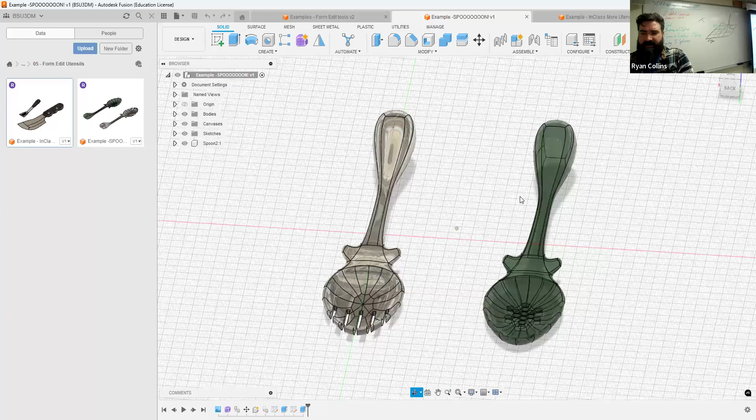So let me switch over. First thing is we made just some basic spoons. Two can be similar, so it can be an original object, and then the other can be a modified version of that, and the third has to be its entirely separate thing. I do expect handles, details, all that sort.

So a real simple way of working is something like the spoon shape. Let's start a new project. Save what you got. Example, we'll say new spoon. All right. So how we're going to go about this is obviously start with create form. You can most certainly work from a pre-made shape, that does help. Let's see if I remember to insert or have a picture on hand.

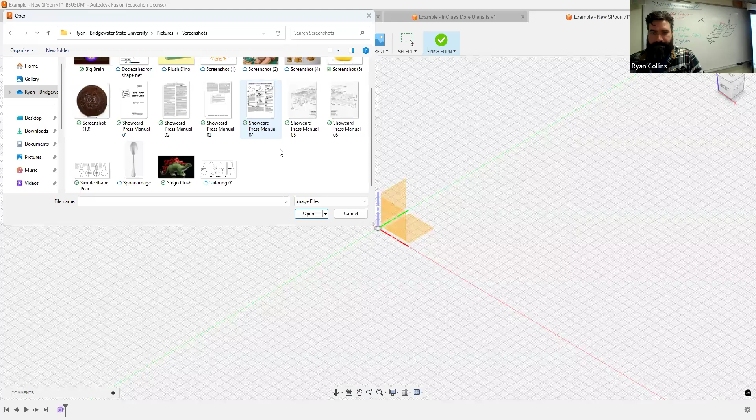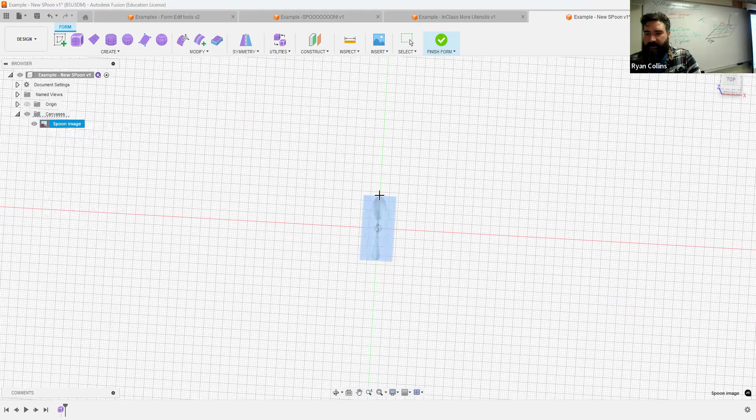The old spoon image, why not? All right, that'll probably work. Hit OK. And how big should a spoon normally be? I don't know, let's say it's about 6 inches, which is roughly 150 millimeters. Okay, so go to canvases, right click to calibrate, top, pick 2 points, or you can make this a gigantic spoon.

So right now it's 34. Let's say, I don't know, 165 for no good reason. Resize, and there we are.

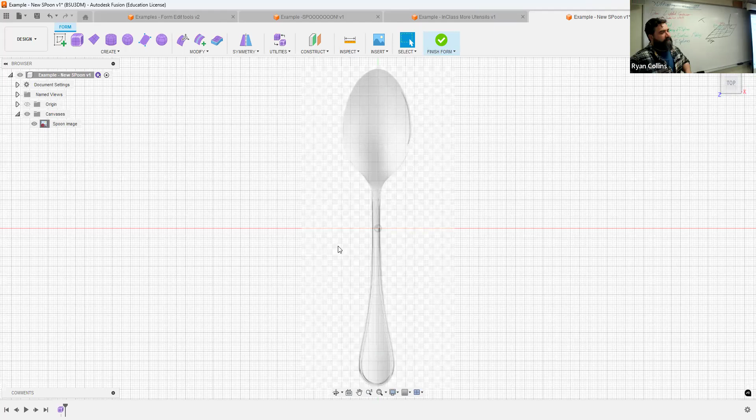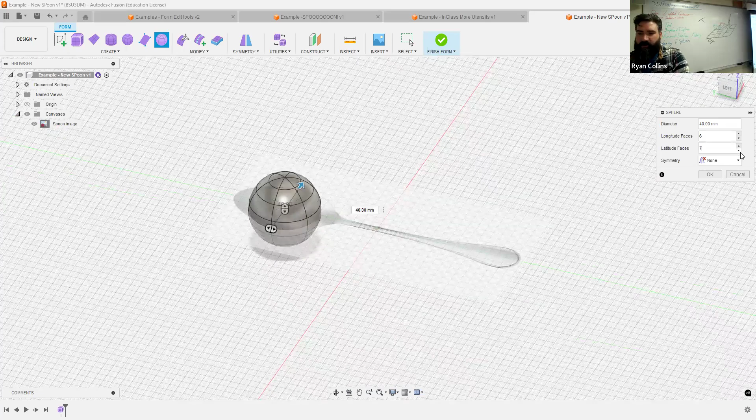Okay, so I'm currently still in the Form Workspace. No need, I don't need to be out of the Form Workspace to work. But what we're going to do is basically break this into two separate objects and then merge them and such. So starting point, easy starting point would be, let's start with a sphere. Build from there, close enough is close enough. You're going to drag this roughly to the size. That'll work. Now, like I said, one of the main things, keep this simple for now. If I need to bring the amount of faces down a bit, that will work best. So there we are, super duper.

What's up? How do you make sure that the circle is perfectly in the middle? So it's easy, doesn't have to be... but I just dropped it in place. Yeah, it doesn't have to be exactly in the center, but it does help.

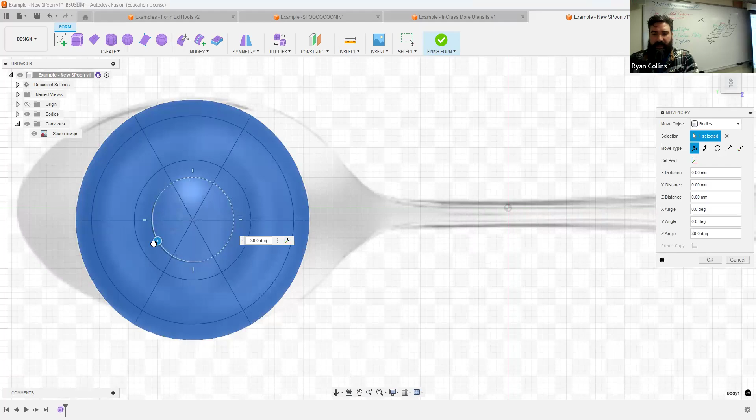Now, the one thing with reducing the amount of faces here, symmetry kind of gets more difficult to mess with. So what I mean by that is I'm looking at it from the top, and I really want this to be symmetrical left and right. So I would need to rotate this sphere. Let's grab that, rotate it so that line lines up with the major axis. That'll work much better. So now I can apply symmetry. Let's do internal symmetry, cross, and now you can see that green line is applied across the sides. Great.

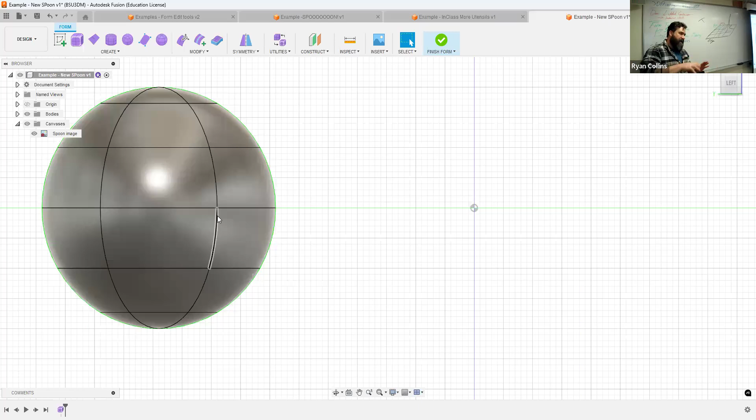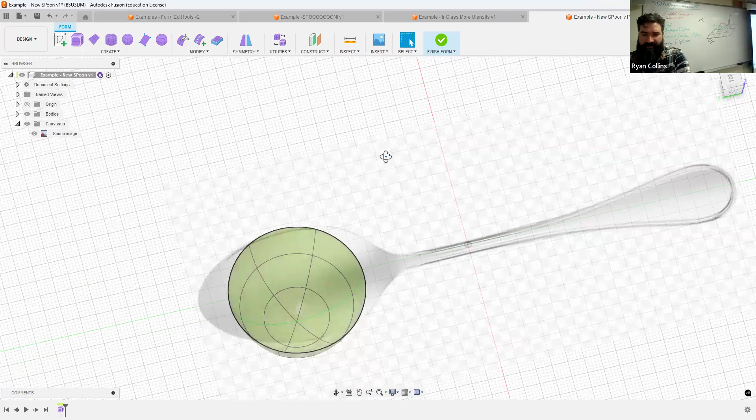Now, you might want to think, all right, sphere, that means I need to push part of it down, blah blah blah. No, I just told you, you can delete faces, convert this into a surface. So let's do a from-the-right selection, selecting all the things above the equator of the thing, hit delete. Now that is going to be a surface. Let me go back to Control in or Command in just so I have auto color on. So this is now going to read as a surface.

Cool, now we can start to manipulate. So we've used the edit form space. This makes sense, sometimes it's going to depend on how you like to work. Sometimes working through vertices works well. But one of the other things is this is all pretty direct, as in, all right, I'm going to have to select all of these, I'm going to have to smush this down, but it all kind of follows suit. I don't really have a lot of soft control, it's all pretty sharp edges.

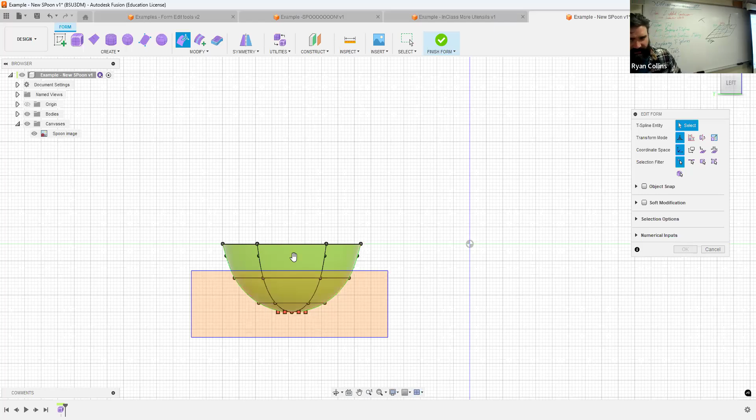Well, that's exactly where this drop down here is, soft modification. So right now you can see my selection, just kind of like the red line, anything like that. If I select the checkbox soft modification, now if I select, say, all the bottom ones down here, you see how my black line has turned red and kind of diffuses upward? That is the visualization for how far the effect is. Now you have these options here, the distance, so you can select by extent and how heavy the weight is. Extent, you can shrink it. So that would be, I don't know, like 10.

So let's say small, let's say 10 millimeters. Now you see that line went from red all the way up to the end here. Now it's black and red, and it kind of starts to divide, starts to fade out into white. That's showing the area of effect.

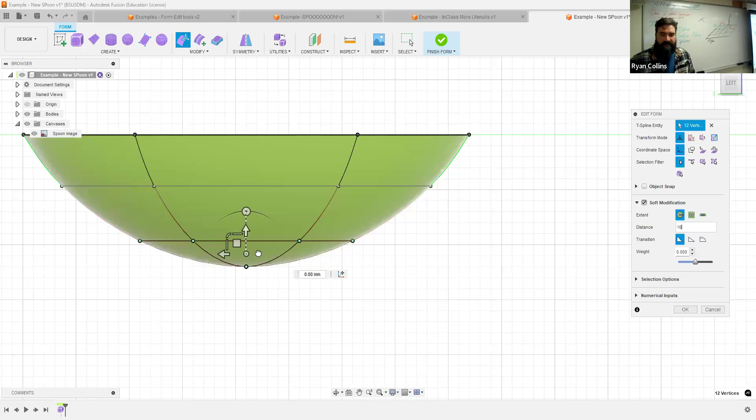So now when I click and drag, you can see how it's much more smooth. It smooths out the line, smooths out the edges a lot more effectively. This is a great way to work using the soft modifiers, because otherwise you get some really hard, sharp edges and such.

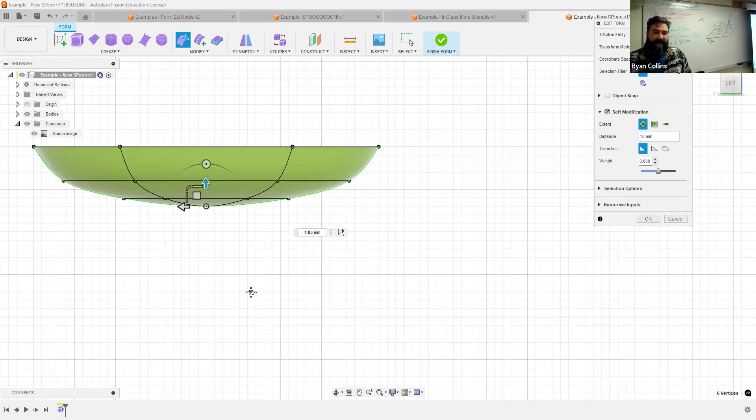You have, of course, a whole bunch of different shrink and grow methods, stuff like that, and you have your numeric inputs. A lot of that stuff kind of gets to be a little overkill. I honestly like to just work with selecting and moving them up and down.

Now, the problem is, now that I've selected all of these, the red goes all the way to the edge. This line was lining up right with the green line, which is my virtual plane. Now, as I move it up, it's actually going past that because I have the soft modifier on. So let's Control Z that last bit. I'm going to turn off the soft modification.

And now when I select all those, that line stays put. That's because the area of influence is much smaller, but it does get a little bit weird and squishy. So use that as you like.

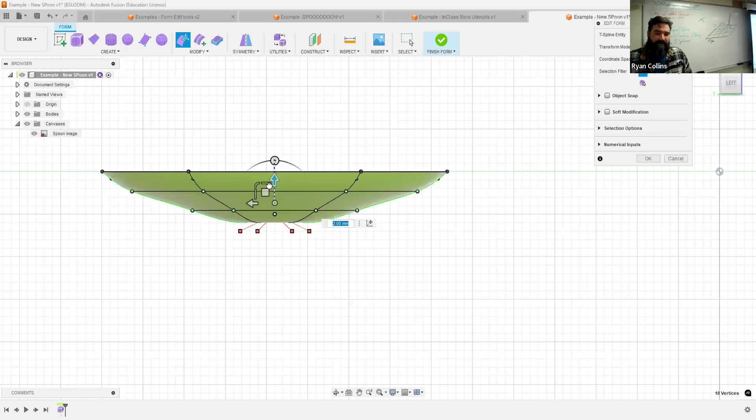So if I wanted, I can go back. If I really wanted to keep it smoother, I can turn the soft modifier on, but let's shrink the area of influence to like 5 millimeters. So now that no longer affects the top there, now I can get a little more control over that.

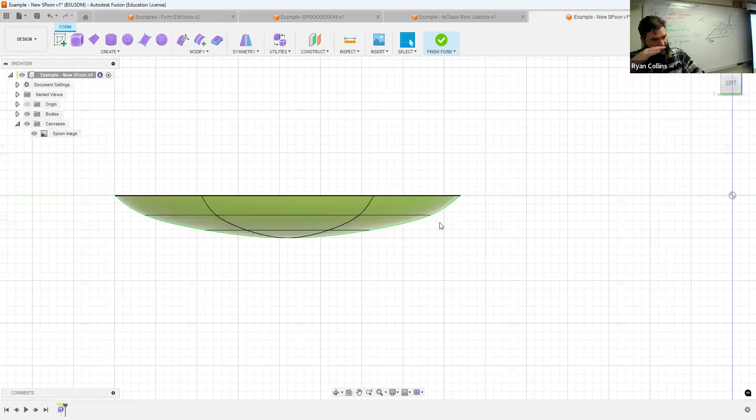That allows me to play a little more easily, shrinking the depth of the spoon. You can make this as much of a scoop or spoon as you like.

So now from the top, let's play around with the shape. Go back to there. So now maybe instead of vertices, I want to work with the edges. That's going to allow me to work with, say, just there. I can turn the soft modifier back on.

As I drag it outward, it's pulling a lot more than I would like. So let's Control Z that, and turn off the soft modifier. Sometimes it's going to work better for you, sometimes not. But right now, because that's such a large space working through the edge, it doesn't seem to work as well for me.

I can shrink it, and that's going to do some stuff. That's going to get me closer. But honestly, I think instead I'm going to work by vertex.

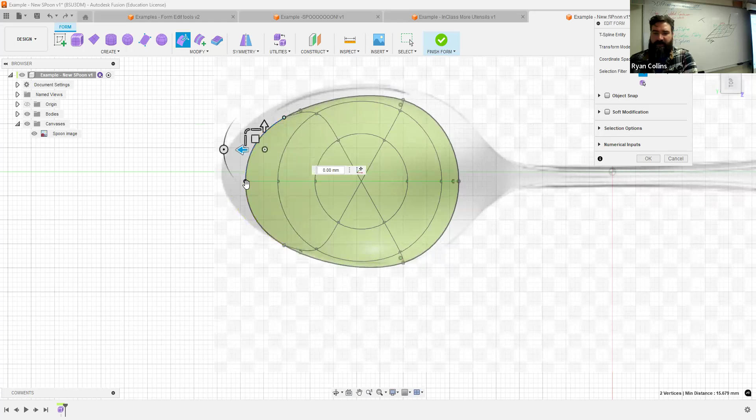So I'm going to select that one, drag it forward. If I go to the side, the problem is it doesn't really work as well because now I've got a really sharp lip. So let's Control Z that, and a lot of this is going to be back and forth. But I'm going to work by vertex, and instead I'm going to select all of the vertices there.

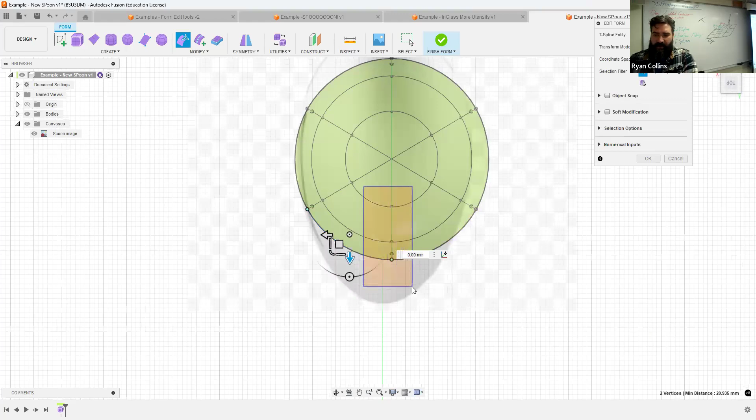Go to the right, and now let's drag that forward. You can see how now all of them are kind of following along. So a lot of this is not a precision project. This is very much going to be close enough is going to be close enough.

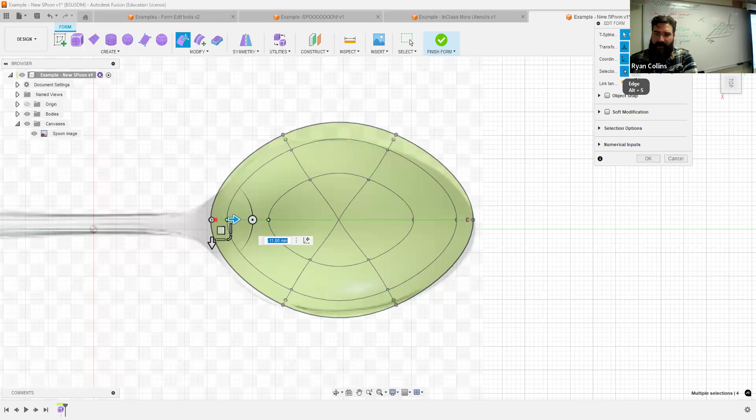So let's select from there. Let's go toward the back. Starting to look like kind of a pretty funky spoon. So if I wanted, I could work by these vertices, but now I think it might work better by edge. So let's grab that edge, move it inward. Every once in a while, just warp around, see how it's going.

You can see from the side, it's a pretty shallow spoon. Maybe I should have made it a little bit deeper. Okay, well, let's select all of those vertices again, drag downward a little bit. So again, this is all going to be just a little bit of back and forth, nudge it, push it, tweak it.

Let's call that close enough for now.

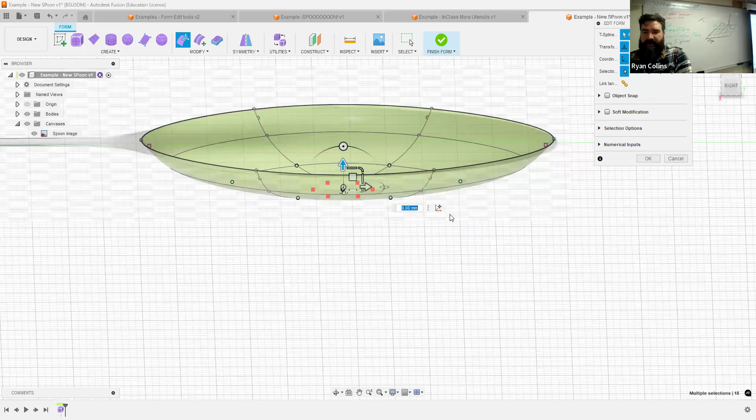It's a shallow bowl, that'll work. All right, so let's hit OK.

So just for my own sake, I'm going to hit save and call it spoon bowl. Now I want to make the handle. Technically, I could take one of these edges and drag it outward, but I want to show you how to merge different form bodies together.

So I'm going to start with a plane. Like we talked about before, a plane is an entire flat shape, complete with its own edges, vertices, and faces—or in this case, a T-spline plane. It works the same way, in that you have to pick a plane to work from.

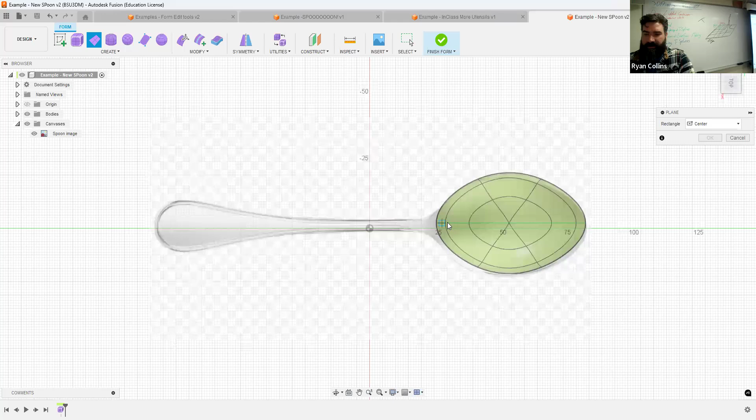Unfortunately, what I should have done was make sure my spoon was a little closer to the center line, because trying to build this is going to throw me off. So I might want to build outward, or edit that image—I probably should have just moved it over a little bit. There we go, just 2 millimeters seemed to work well.

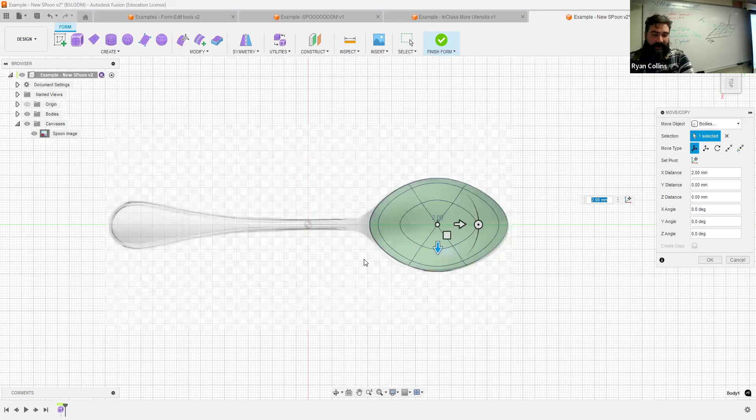So let me select that body, do the same. Why is that 2 millimeters but lines up better? Don't know, whatever. In all reality, you should totally line up your image before you start working. All right, that works a little better—easier to follow along the handle.

Again, you're making this your own, so if you deviate from whatever image you're using, that's fine. You can use an image canvas simply as a good reference point.

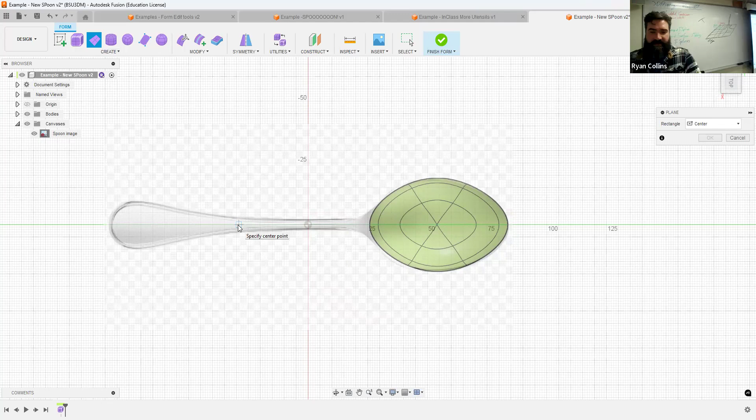All right, so I'm going to restart working with the plane. Select working on that one. I'm just going to select somewhere in the middle, because this starts by building a center point rectangle. So I'll stay on the major axis, in this case the y-axis, somewhere out here. I don't need it to go all the way over to the handle or the bowl—somewhere else close enough. Probably should have moved it over a little, but whatever.

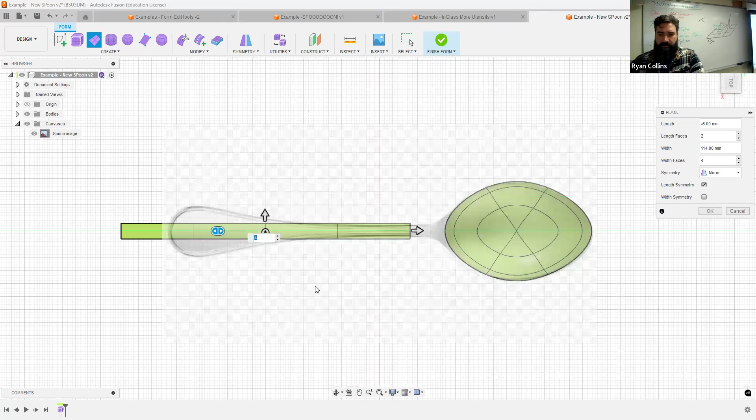Hit OK, let's see how many faces we got. All right, length faces 2. Yep, but let's add a couple going this way. Sure, fine.

Default was length symmetry—if I did not have that checked already, let's hit OK. And I do want to have symmetry applied. You can always go back afterwards. Yep, internal symmetry on one side of the face, and on the other, the green line applies.

Let me change the color so you can see the green line more clearly. There we go. And there you go, because I want to make sure this is symmetrical on either side.

Okay, cool, back to edit form. A lot of this is going to be edit form. In this case, I think working with an edge will make more sense. So I'm going to select that one, and I'm just going to drag that forward.

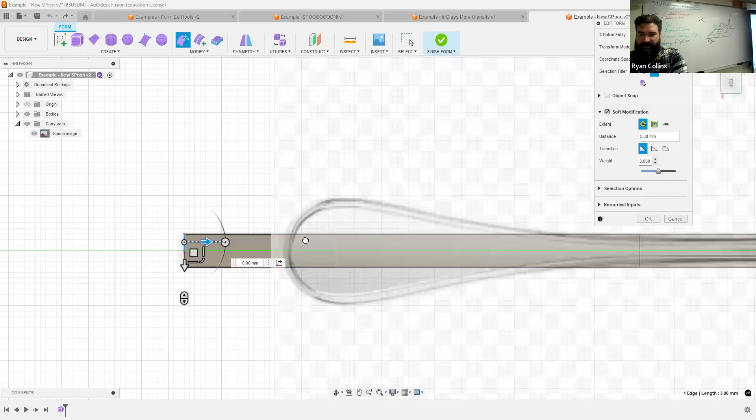That shrinks the distance between. Again, if I had instead had soft modification on, I'd have a little more soft control—doesn't really matter, it's up to you. If I want to select my vertex, grab that one and just drag that outward, you can see how it instantly starts to smooth around.

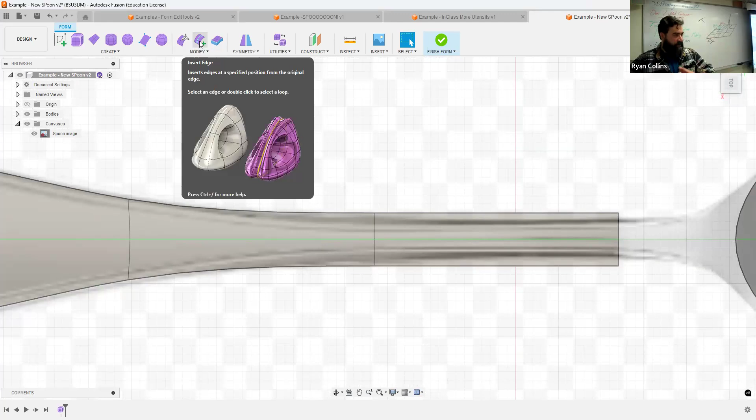If you decide you wish you had a little more control here, say in between here, this is where you could go in and add an edge. Insert edge allows you to select and create an edge anywhere between two starting edges. So if I select here, it's going to try to put it over here, or if I put negative, it's going to go over this way, which is what I want.

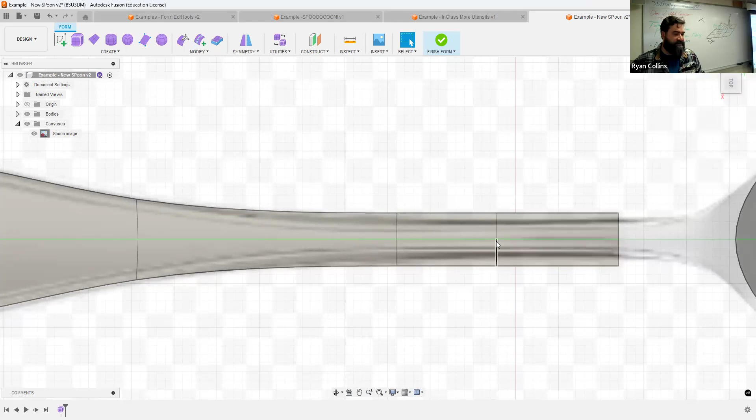I want to make sure that if I have it on both, it'll go on either side of that edge I selected. So single is good, but because I have symmetry on, when I hit OK, it's going to apply it to both sides, on either side of that symmetrical line. So that just adds an edge so I can add a little more complexity to it. Again, just playing around here.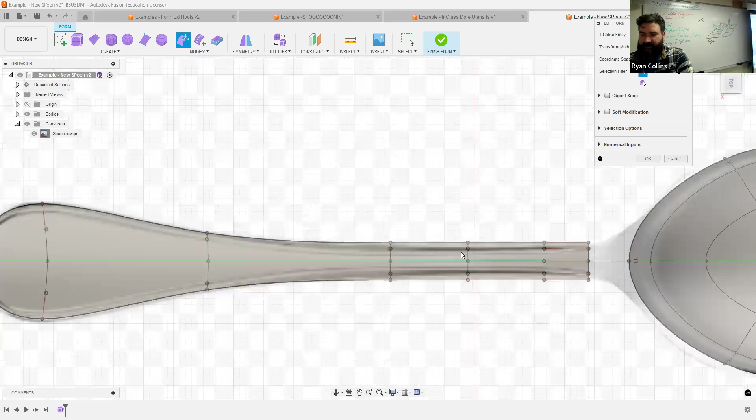Let's say selecting that edge there, we'll get it closer—I don't want to get it right up against the bowl here, I'll show you why in a minute. So let's select by vertex, and you can start playing around, panning. If you start rounding out these edges, and they get away from being straight up and down, that's perfectly okay.

Close enough there. Now, one of the things here—I showed you how you can delete faces to get a truly curved edge, so for the back, you can delete vertices as well, and edges. So let's select that vertex, hit delete. Now it's going to round it out, and that's going to shrink some stuff. Sometimes you'll run into weird effects because essentially you've just taken a corner and deleted it, but it's still two edge lines.

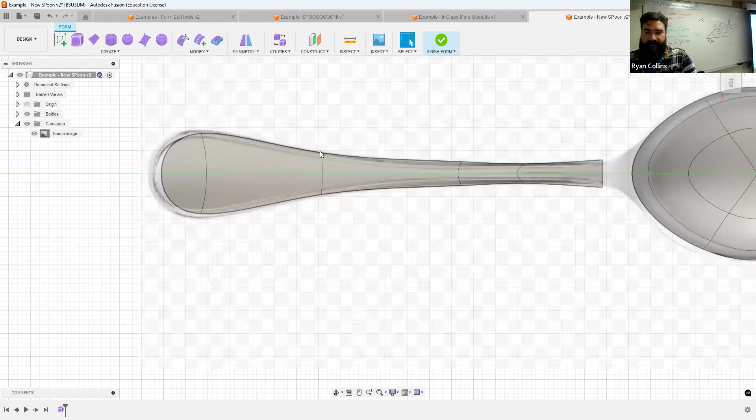So it just sometimes reads as two different ones, but that's an easy way to make something much more rounded—just delete the vertex that connects the two. All right, and again, just playing around—close enough is going to be close enough. I don't know, edge there. Let's scale it up.

Two-dimensional scale, okay sure, fine. Hit OK. All right, that is your basic handle. Now it's still just a surface, so when I go to look from the right side, it's a flat plane. Remember, a surface is essentially a sheet of paper. That's it. So until you add dimension, it's essentially just that.

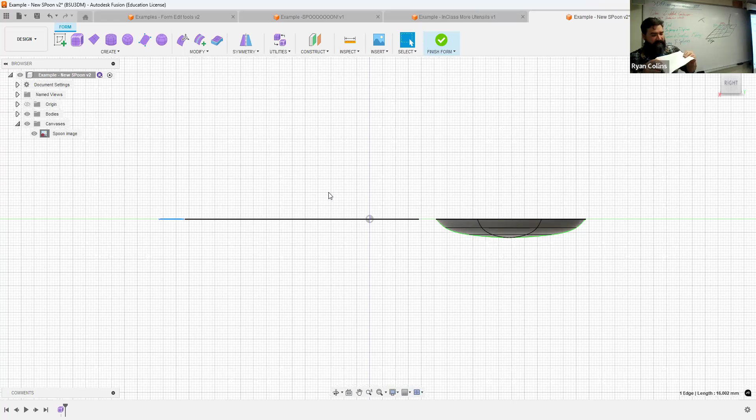So we're going to add dimension to it, but first, let me save. All right, simple handle, cool.

The other tool we're going to use is called the bridge tool, and this is exactly that. It creates surfaces, creates a surface between. Technically there are things like merge edge, which just snaps them together, but bridge is what I want to use here.

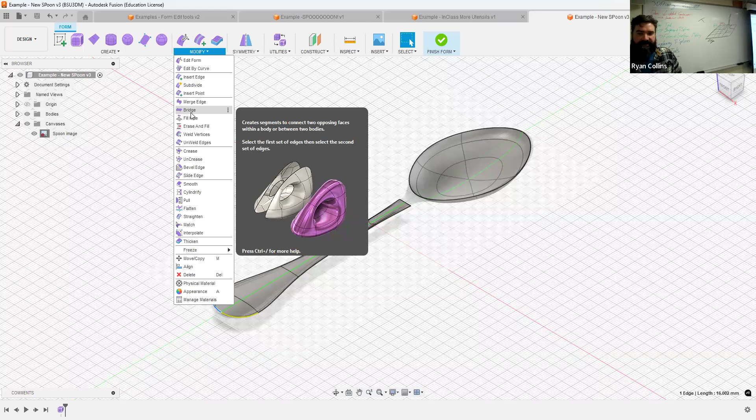Now the trick to bridge is, though, it has to have the same amount of faces on either side. So this is why I simplified that sphere down to six faces. So I have a face edge on here and a face edge here, so two on the side of the handle. One, two, I need those to match.

If they don't match, say this was two and this was four, all you would need to do over here is use the insert edge, and you could go to both. If I added an edge like that, now I just created one, two, three, four. So it's really easy to subdivide a face to add edges so that the bridge tool has the correct number of faces to match.

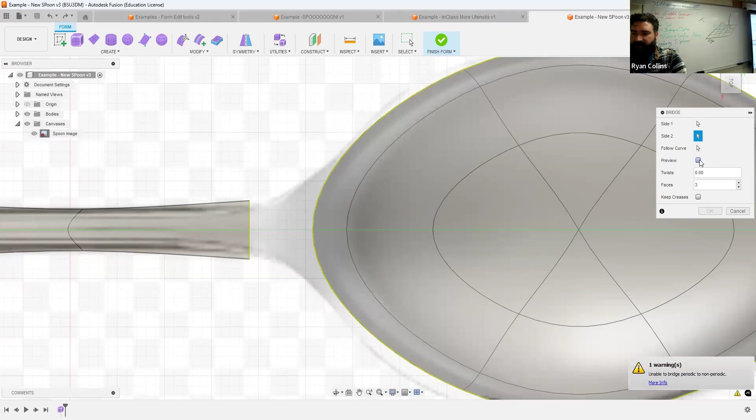All right, so let's use the bridge tool. Again, you have your two sides. I'm going to select this one, double click that side. Side two, I have to check it off on the toolbox. Side two here. You do have a preview tool, this will show you how many sides, how many faces you have.

Let's simplify that to one. See, it's not showing the preview. It should be showing the preview. What's going on here? Oh, I somehow accidentally selected the entire edge here. I just wanted one and two. There we go, I had accidentally selected the entire perimeter of the bowl. All right, so I have my preview.

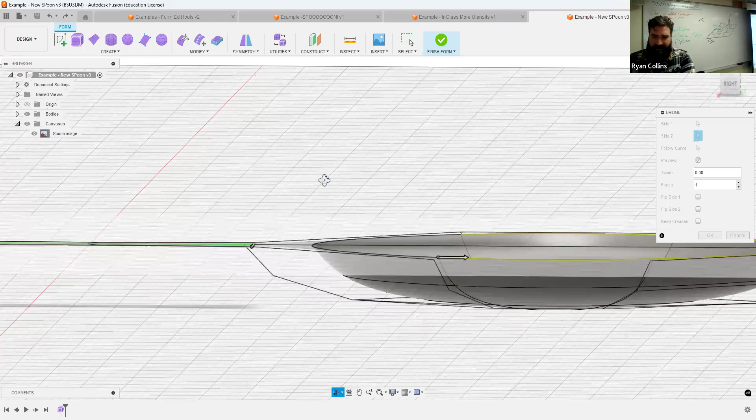Again, this is the simplified box mode visualization there. There we go. You can, of course, if you really want to keep it sharp, keep creases. I don't, let's say okay. So that just created this whole rounded edge here to bridge the two, hence bridge.

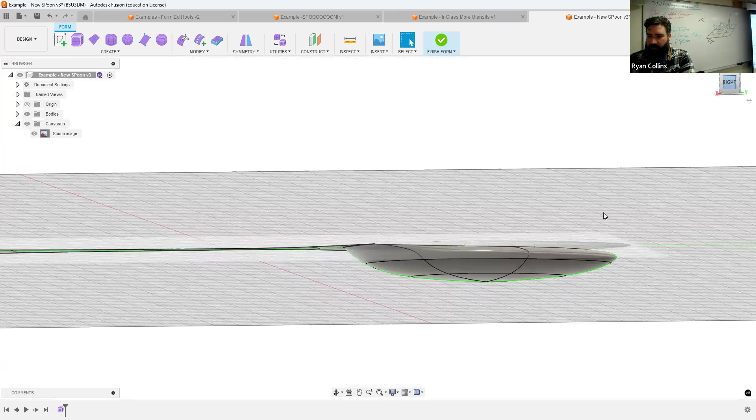Now the whole thing here is it did keep it really flat, so if that's not something you wanted, there's an easy way to go about that. Whoa, what happened there? That did some weird curvature to my bowl here. So, all right, so I'm going to do some modifying in general. Let me Control Z that, don't want that.

So a couple of things: one, unless you've got a really cheap set of spoons, they're not going to be flat. So I'm going to go back and modify the handle a little bit, simply by going to Edit Form. We'll go by Vertex, I can see a little more clearly. Let's put a little curvature to that spoon handle. So I'm going to select those and just drag that upwards a little bit.

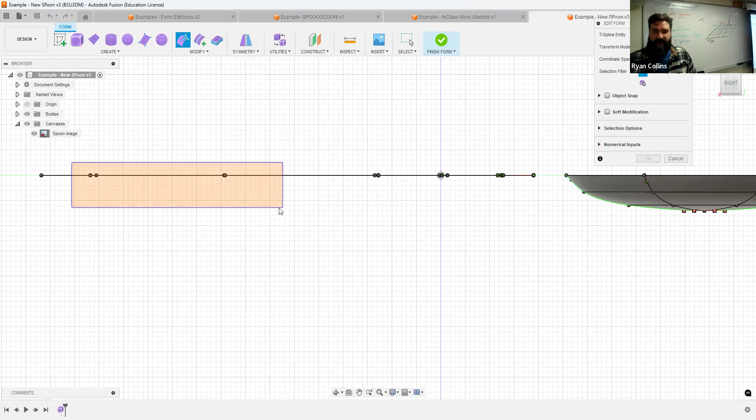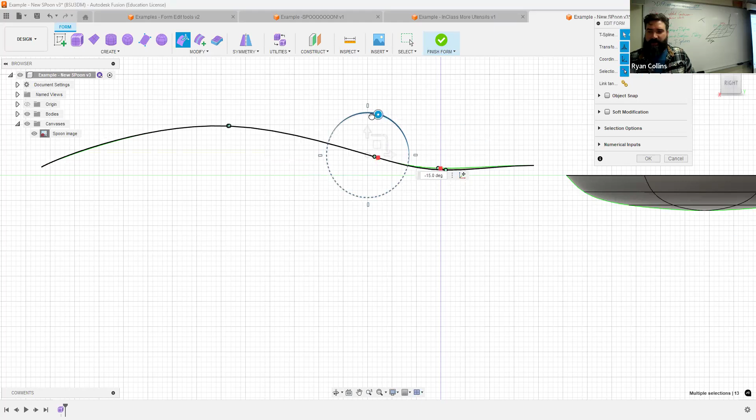Actually, I think all of these probably should be up just a little bit here. Probably going to make the most uncomfortable spoon handle here. You could also, if you selected multiples like here, you could use the rotate tool. Now that is going to be an extremely non-functional spoon, but you see what you can do with it. All right, so there we go.

It's just a little bit more ergonomic, or not. There we go, you can free transform these. Yeah, that is a funky spoon. Whatever, it's your spoon, you do it how you want.

So now bridge should work a little bit more effectively. Hit OK, all right. The other thing is if bridge is working a little bit too large, let's try it again here. Double click or just click on that side. You see how much larger the edge is here.

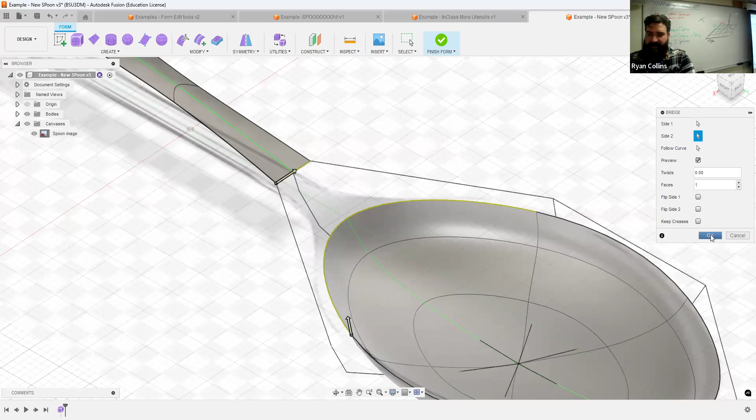So it's going to create some pretty weird stuff. So it created a much bigger surface, but actually that's a pretty smooth transition. And it did not select the front, I had accidentally had that selected in a weird way. So, okay, if you don't want it that way, remember you could also repeat the bridge. Let's select both of those.

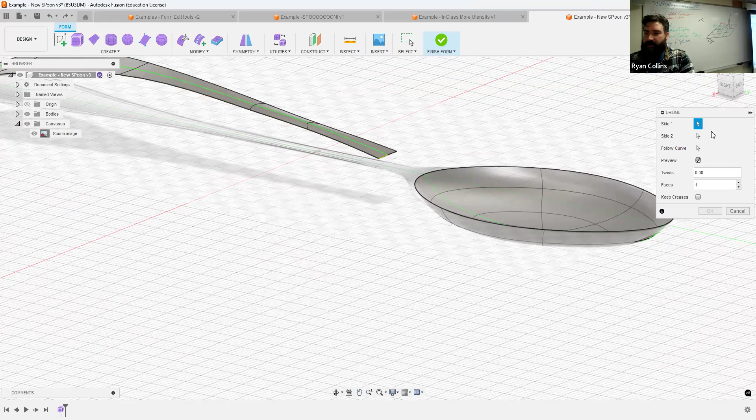Change it out, and if you wanted, say, keep creases, hit OK. Makes a much sharper edge transition right here.

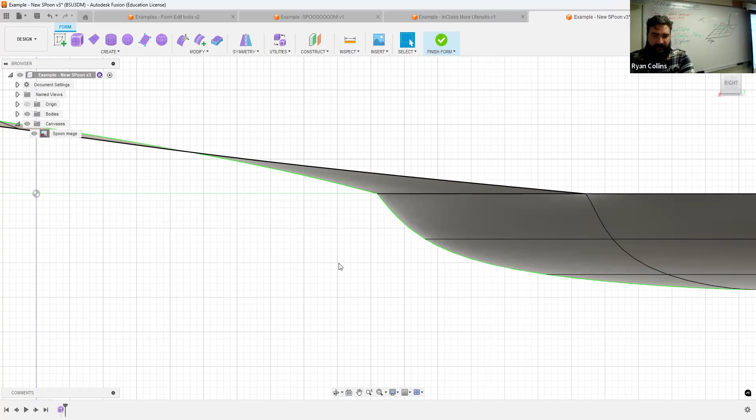That's all. Again, unfortunately, because you cannot work like we normally would and just go back and edit a tool, we have to Control Z, or Command Z if you're on Mac, and reapply the bridge entirely.

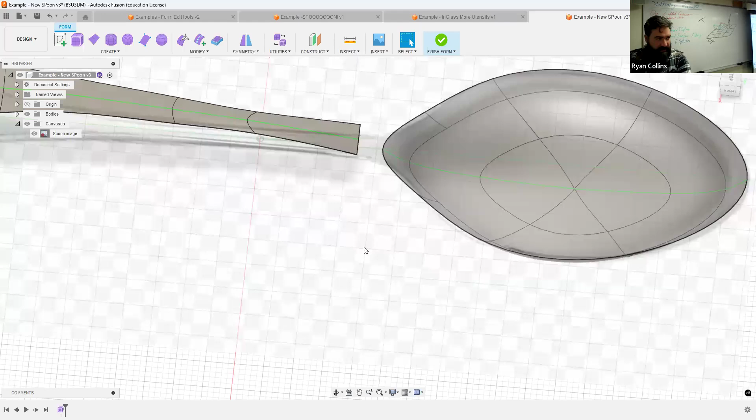Now, obviously, anytime you add an edge, it's just adding more subdivision, so it will reshape your tool, your form, a little bit. If that's okay for you, great. If not, you've got to go back and edit the tool.

So now when we go to bridge, select both sides there. Now I have a little bit more control because it's just over this one little section. I do not want to keep creases, so the selection is just a little bit smaller. That's all. So now that I have the bridge applied, I've joined the handle shape and the bowl shape, and I can still go back and tweak this if I want. The other option, let's just save here.

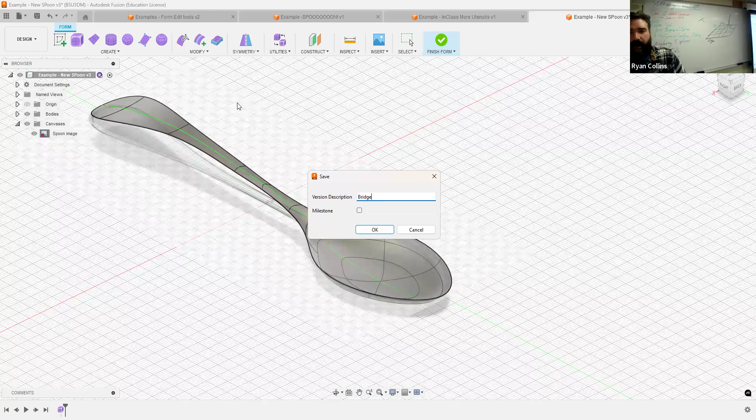Bridge is now let's get it away from just being a simple surface. That's the other main tool here, thicken. Select the body. Like we talked before, you can add a little thickness. If you want a soft edge, it'll make it a rounded edge just like that. Sharp edge, just the same.

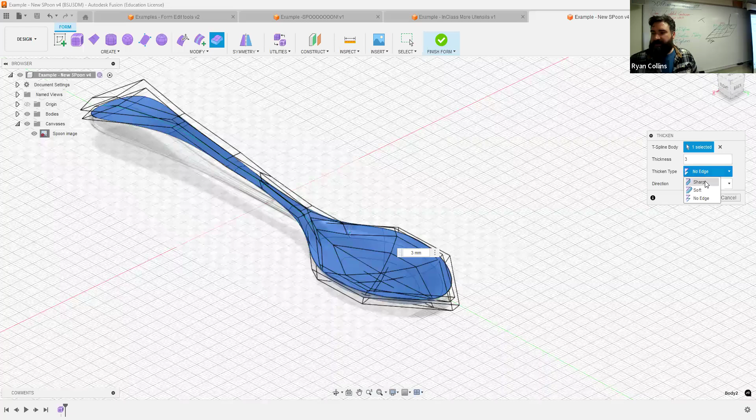The reason you might do no edge is if you then want to manipulate it on your own, so I'm going to keep this as a soft edge. If you make this too thick with a soft edge, you end up with basically toddler spoons. But hey, again, your spoon - 3 millimeter thick spoons, pretty beefy.

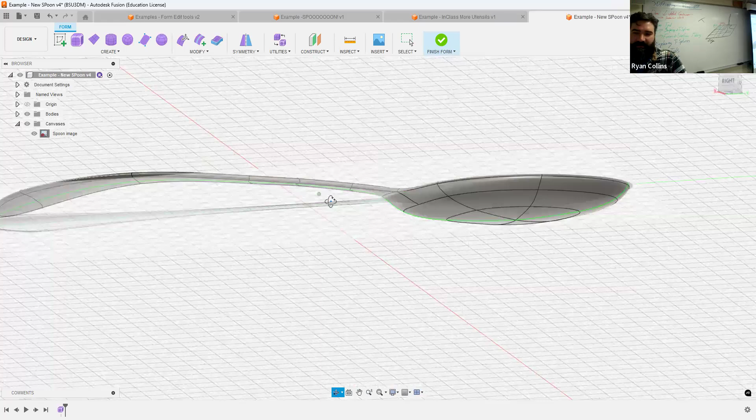So let's change that up, repeat thicken, and instead let's say 1.5 millimeter. Okay, slightly less toddler-tastic. All right, I've made a basic spoon. Hooray.

Thicken. All right, now I have a body, and if I want, I can go back and manipulate from here. So how I did this one, with the mega end there, go back again, edit form. Edit form is going to be one of the main ones we're working with.

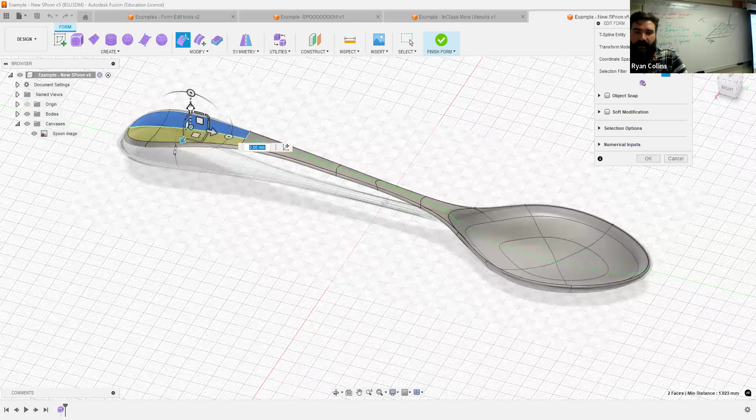I don't know, let's play with the surface here. All right, I can drag that upward. Oof, beefy. Or shrink that and then rotate.

So that's a simple way to get some really weird shapes into this. Again, you could then play around with, say, extruding. I don't know, let's give it - let's press and hold Alt. It extrudes outward.

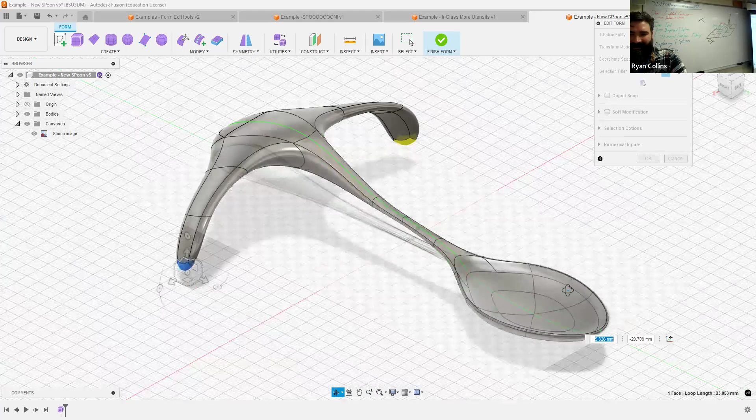Now it's like a cobra spoon. I don't know, it's up to you. Or bug eyes, I don't know, do whatever the hell you want with this. Or heck, if you really want, rotate it down, give it legs. I don't know, freaky spoon, it's whatever you want to do.

All right, terrible spoon, Finish Form. Hey, I got no errors. Sweet. Strange spoon. All right, so we got spoon one.

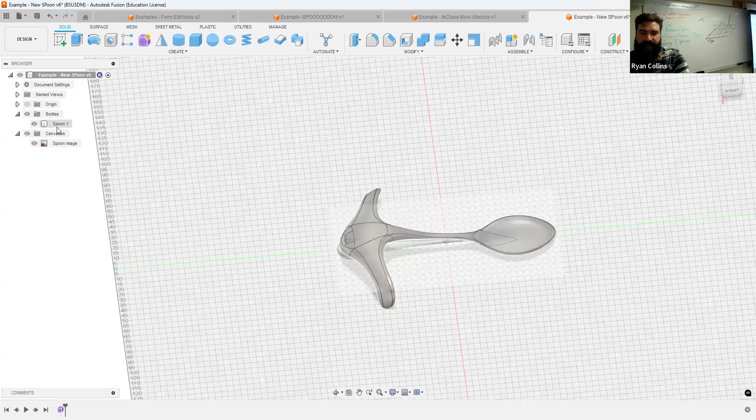I want to be able to manipulate this to make variations of the same, so let's copy and paste. Control C, Control V, and just shift one over a bit. Hit OK. Cool, so now I have my two versions.

If I want, like I said, for this assignment, it does need to be on two separate components, so let's create components. If I can spell spoon, that'd be even better.

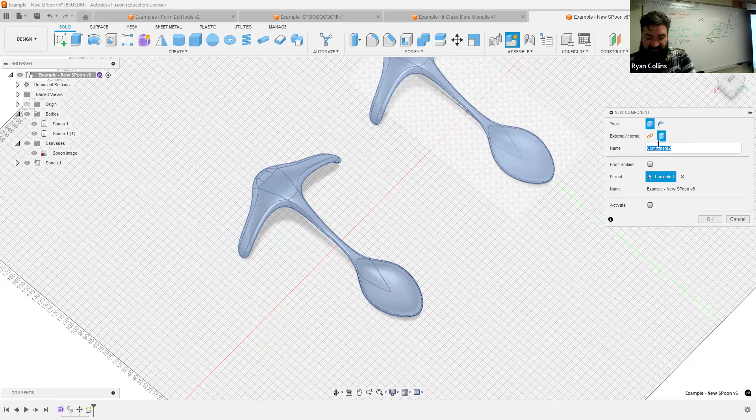And then we'll select - oops, I forgot to do that - uncheck the activate. Spork, why not? All right, so let's click and drag. One goes onto one component, the other onto the other component. All right, so we got the spoon.

That's the one we're going to keep. Going to hide that for now. Activate the spork, do some weird stuff with this.

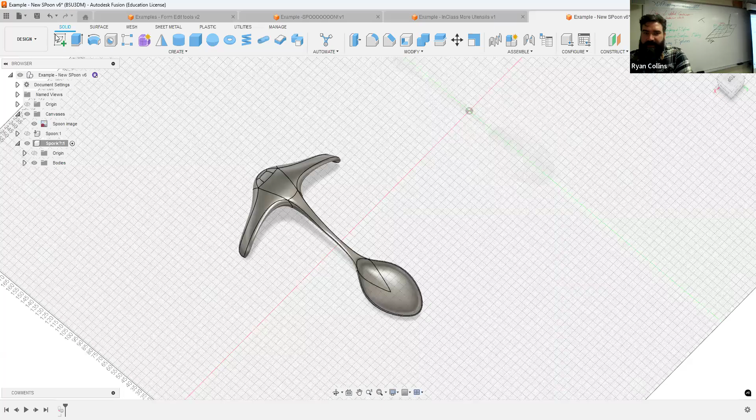All right, so first I'm going to create a sketch, an easy way to keep track of what I'm doing. Let's project that body, hit OK. Now I don't have to have the body present, visualized, to do what I'm trying to do. All right, so if I want to keep this line symmetrical and such, easy way to do it.

Let's just create a construction line across something. Now I have a center point that I can drag downward. Again, I'm just working off construction lines, these are just reference points. If anything, might just select all the outer ones, turn that into a construction line too - these are just reference lines.

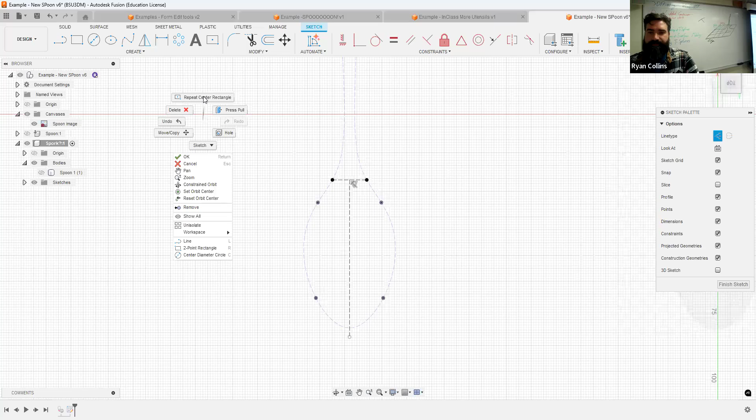Okay, so say, sure, spork. All right, that'll be a standard one. Let's create one section, that's a little large. Center point rectangle right on the end. How wide should those tines be?

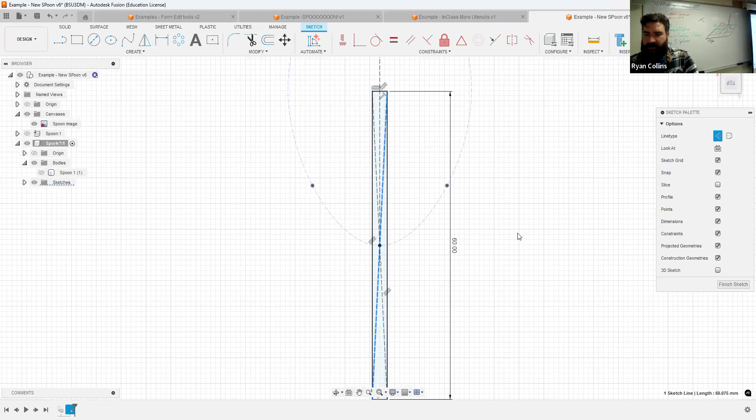I don't know, 3 millimeters wide and something deep - 60, sure. That should have been... I forgot to deactivate the construction line, so all of those off construction, although those cross sections do need to remain construction lines. Okay, turn off construction line.

Okay, I don't want to try to measure all those out, to heck with that. Let's use a pattern tool, going to go to rectangular pattern, sketch objects, just select all the thing.

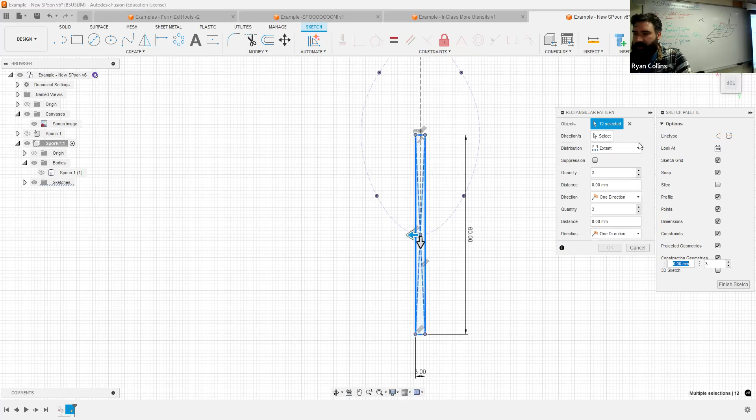There we go. Direction, we're going to go that way, but I want that to be symmetrical. And let's, I don't know, say 5. There we go. Add a few of these.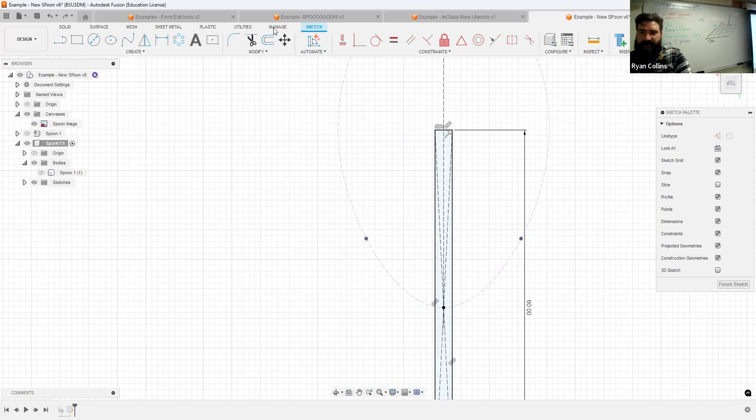Cool. And I already messed up, because what I should have done - let me Control Z - I should have rounded that out first. So let's put a fillet onto that one, and same to there. Something close enough, there we go.

Now let's do that rectangle pattern, because why not do what you need to do right from the get-go? All right, that was going to be 5. Symmetric, and something to that effect. That seems reasonable enough. Hit OK. Finish sketch. Now, unhide the body.

Let's do an extrude of all of those things. I'm floating above the line there, so let's just extrude it straight down. It switches to cut. There we go. That was above the line.

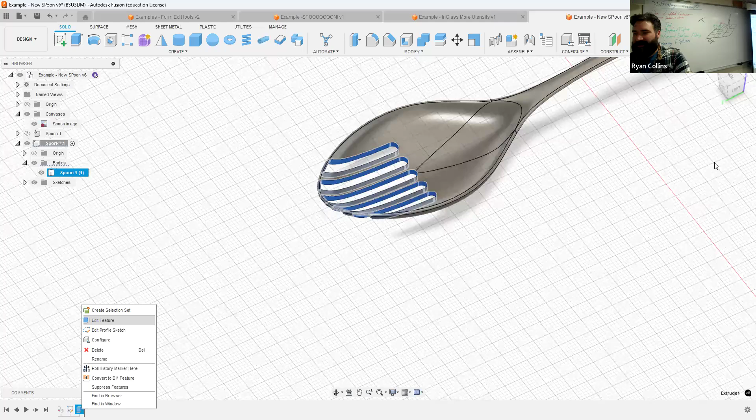Darn, so let's go back and edit that feature. Apparently that should have been 2 sides. Let's also go upward. There we go, less terrible. And then last bit, let's do a fillet to all of those insides there.

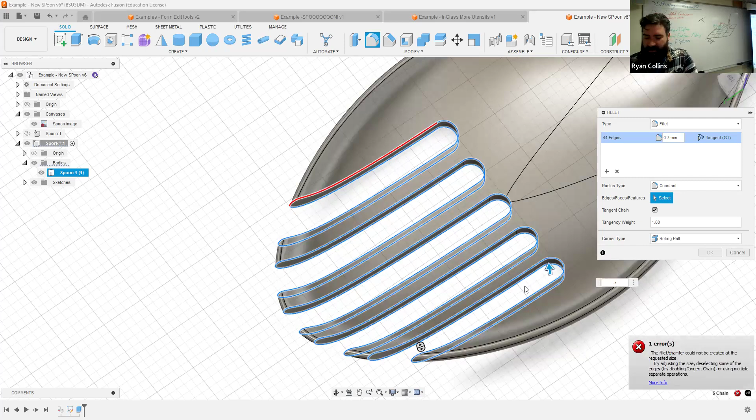And let's see here, what was that? Nope, oh I did a 1.5, so at most probably 0.7. Yeah, we're going to run into some issues trying to find what works. 0.4, 0.3. Oh, 0.3 worked. 0.35, not too much. All right, 0.3 it is. You're definitely going to run into some things that don't quite work.

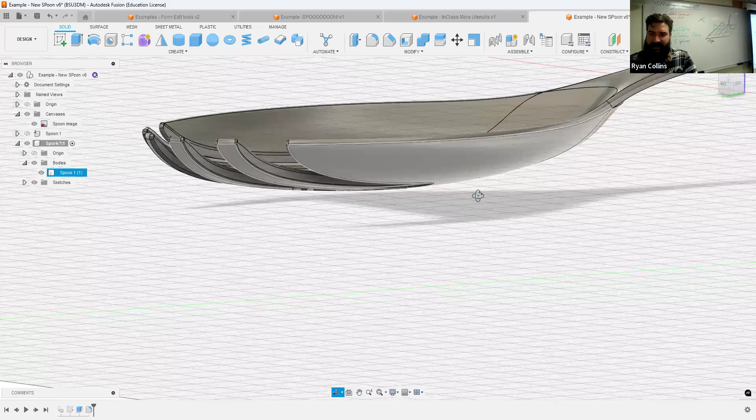But all right, there we go. That is now a very completely unusable spork. Pretty straightforward way of making some stuff, making some modifications. You can very easily do some other modifiers too.

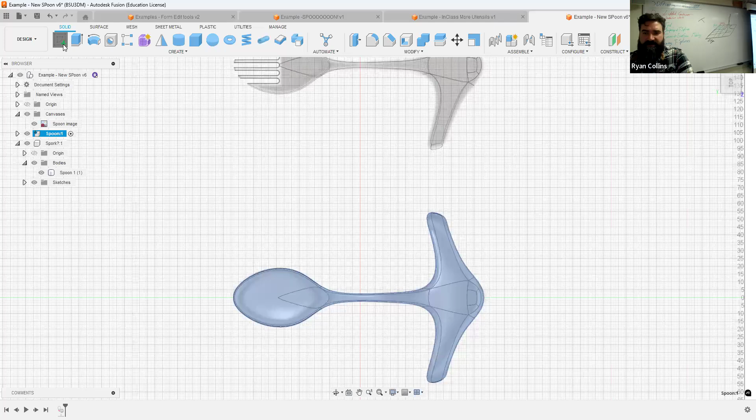Let's unhide the other one. So if I got that one, I don't know, we'll activate that one instead. And let's say do the same deal - sketch on the plane, project the body. Hit OK.

Forgot which one I was working on. Had that body, let's turn that into a... oh not project, I wanted to turn that all into a sketch line.

All right, I don't know, we'll make a circle right there. Should have made that a construction line - or not construction line, I don't know. Now let's make another one somewhere out here.

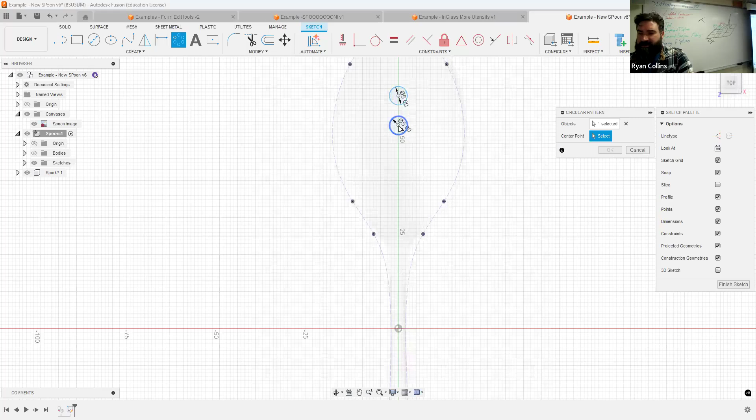And use the circle pattern. Center point is that center circle. Sorry, geez. Let's add a few more until it makes sense. Sure, could have added even more. One more circle up here-ish.

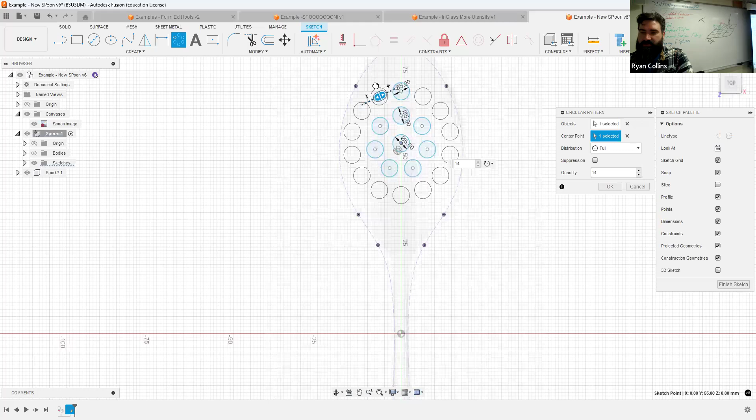Probably should have used the rectangle pattern tool first, but there we go. All right, circle, center point, see if this still works. All righty, finish sketch, unhide bodies.

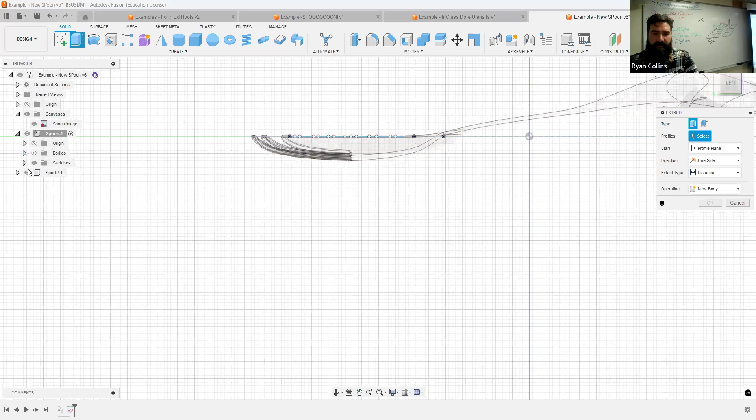And with this one, what was I going to do? Oh right, so if I just sketch-extrude all of those, I'm going to get some weird results because it's all going to extrude straight through. Let me hide that other one. So if I select all of those and unhide that body, it's going to get a weird cut through - weird just being that I'm going to get some distortion and such.

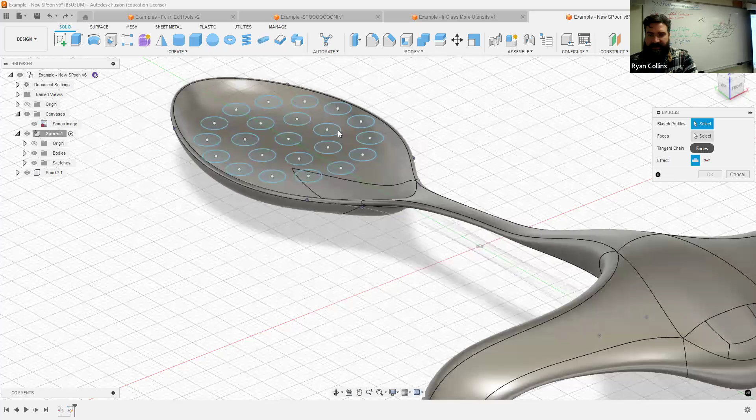So instead, what I could do is something like, let's try the emboss tool. Want to select sketch profiles - all of that. Easier to select from above, all of those. Faces to select to - that face. See if it'll work.

Might be overloading the program. There we go, buddy. Oh, what's my error? Cannot emboss feature at that depth. Okay, deboss, cut through.

Sometimes you'll have to go with the extrude. Oh, it worked, great. Let's just change that to -3 so it goes all the way through to make sure. All right, come on, I believe in you computer. You could do it. Maybe.

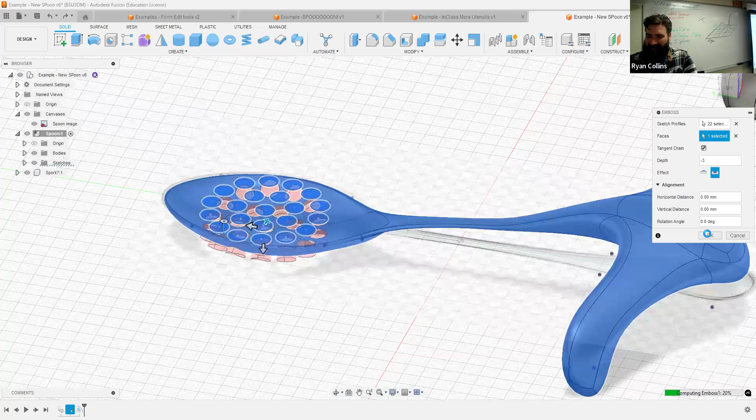I mean, pause for a moment so it... okay. So the only reason I did that is that way the holes going through are uniform in how they're going through the curvature of that body, rather than if it was extrude, you'd get more distorted holes the further out you go. So yeah, if you can, try using emboss on curved surfaces like this - it'll work a lot better.

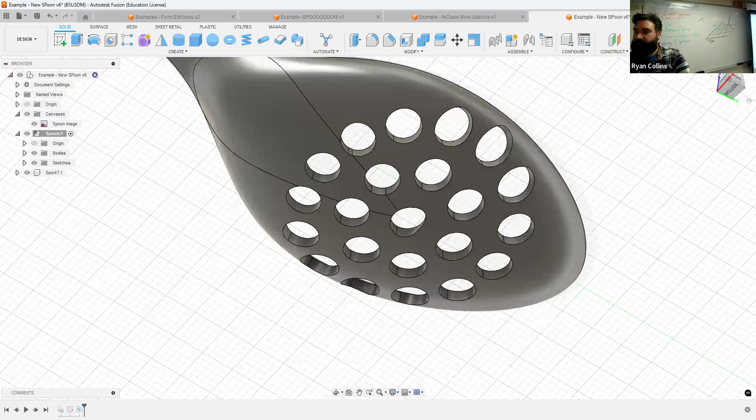All right, strainer - so there you go. Couple different ways to make some simple tools we'll work with. If we get to it tonight, we'll do some more advanced stuff.

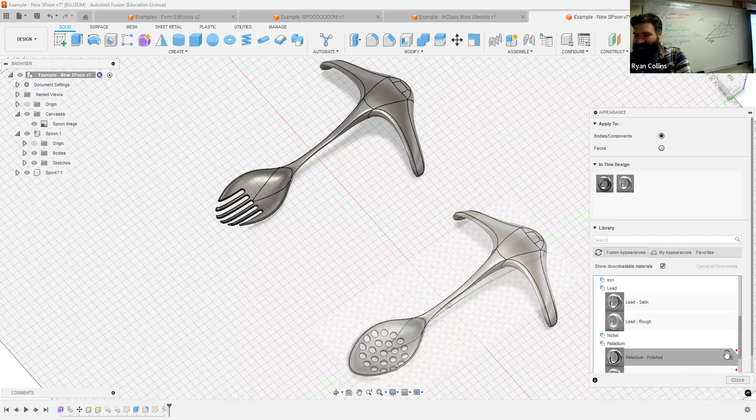I don't know, what do we have? Heck yeah, lead tools or lead spoon - that's supposed to be really good for you, right? We'll have one's lead and one is palladium, because shiny and not. There we go. All right, play around with it, see where you get to, and we'll go from there.